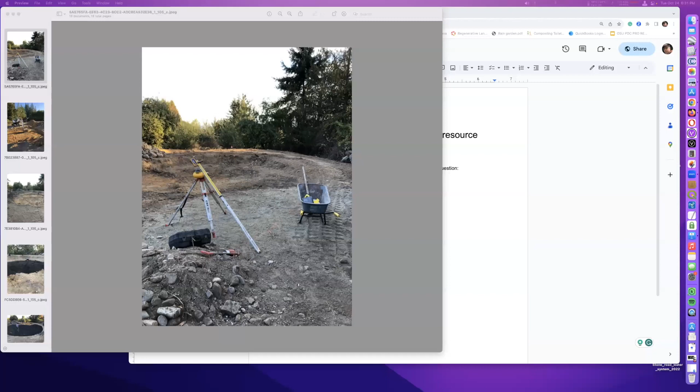All right, so without further ado, well, let me just share my screen here. Okay. And there we go. All right, so thank you again, everyone, and for your patience. For those who were at the Legion last week, we got the first few slides under our belt, but we're going to go through those again. And just a short introduction from my part.

Tonight's title is going to be Rainwater Management, our untapped resource. And this is one of those prime days when we can see how we could do so much better with our rainwater management. We've got a huge volume of water that's come down already today, and it looks like we're in for a little bit more this evening.

All right, sorry about this. I'm just trying to admit somebody. Okay, I'm gonna have to go away from that. There we go. So I won't be able to do that during our talk here. So let's get back to that. There we go. All right.

So here we go. We're going to be talking about rainwater management and just a little bit about myself. I've lived in Lantzville. I guess we've been here 27 years, my wife and myself, and we co-owned our property here with my parents. And we're going to take a little bit of a journey through our homestead during the evening here and touch on that. But again, I've been here 27 years and I'm a regenerative landscape designer and a contractor. I worked with Oregon State University with their online permaculture design course as an instructor with them. Way back about 38 years ago, I took an apprenticeship program with the Vancouver Park System, and that got me set on my way in the landscape industry.

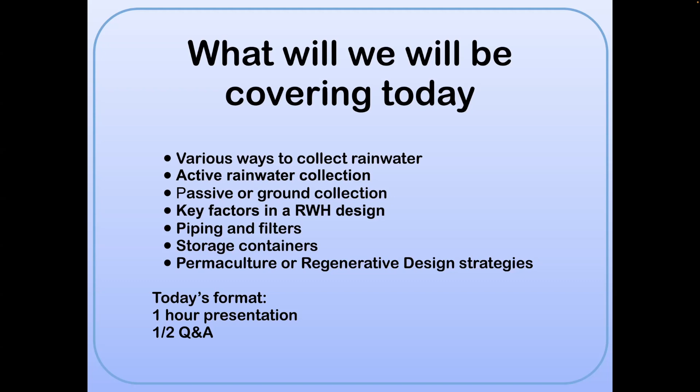And if nobody has questions, I do have a couple extra slides that we can look at, which is always fun.

So just a little bit about rainwater. It's quite amazing that at any given moment, I would say there's approximately 10 trillion gallons of water in the air around the world. And it's quite amazing, the quantity of moisture that's in our atmosphere. And this is just a little diagram about the water cycle itself, and how that water is always in motion, right? It's either evaporating, it's coming down in rain, it could be going across the surface, it could be infiltrating, and ultimately much of this water ends up in the ocean.

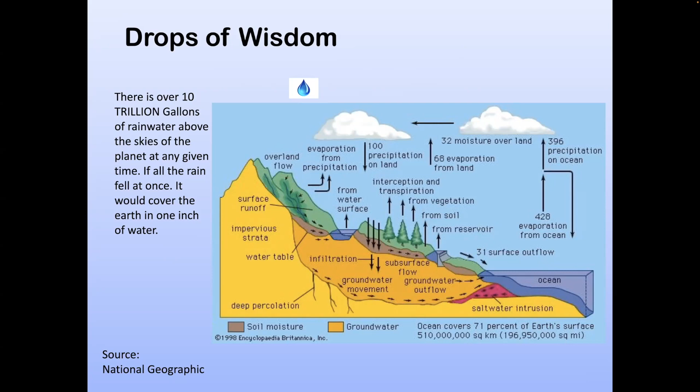So rainwater is distinct, and when we're collecting that, we don't want to get this mixed up with other types of water. So there's storm water, okay? That's water typically off of paved areas, or that sort of thing. If you go to Home Depot in the parking lot there, on a day like this, all of that water is heading across the surface and into storm drains, okay?

And then there's gray water, which is often a product we can optimize in our households. It's often water that's coming from showers, or say the kitchen sink, some sinks, and that's an underutilized resource. We're not really going to talk a lot about it tonight, but that's one of those low-hanging fruits. We have potable water, which is self-explanatory. It's water that meets the Canadian drinking water standards.

We have groundwater, which is actually part of our aquifer, and we have surface water, so water that may be sitting on the surface. So they're all slightly different definitions, and tonight's focus is going to be all about rainwater. So what is it? Well, it's a roof-based system of collection, or it could also be land-based. But when we're collecting off the land, we're doing distinctly different things with these. So that's one thing that we're going to cover tonight.

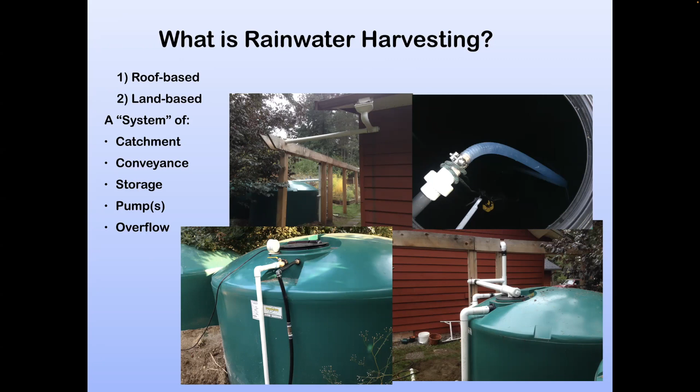So we're going to divert a little bit of that initial water away from storage, and we're going to basically send it back out into the environment because it's not the type of water we ultimately want to collect. And then we have the storage itself with an overflow, and that may or may not have a pump on it. There's lots of things one can do, but in this case, we've omitted the pump.

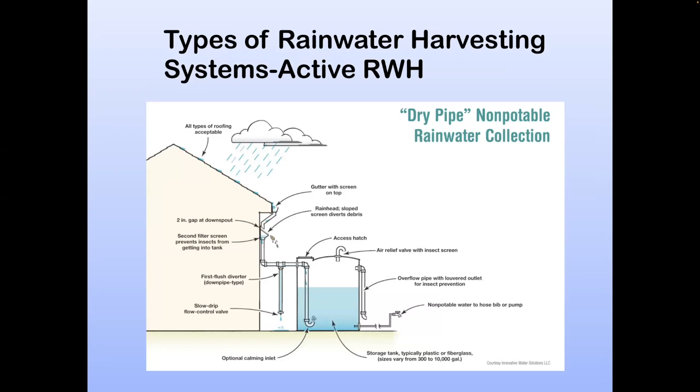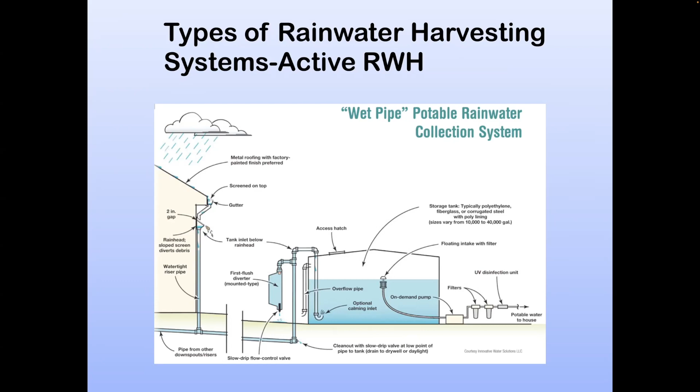Now, when I say that, I mean it'd be a larger cistern, and then we have a lot of filtration that goes on after the fact, as well as disinfection with a UV. So we're just going to touch on some of the parts that are involved with active rainwater harvesting. So putting that water into a cistern.

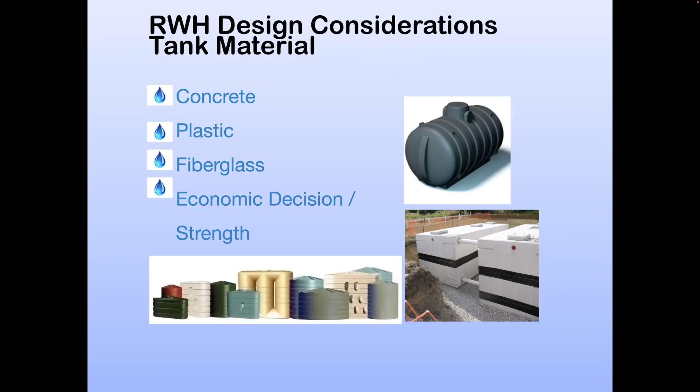So some of the materials potentially that could be used in construction of this would be concrete, and there's plastic or polyethylene. Fiberglass is another one. And a lot of that has to do with your economic decision and the strength that you need. So when we go and we bury tanks in the ground, they need to be able to withstand the forces of that burial. So they subsequently cost quite a bit more, and that may or may not be something that works in someone's budget.

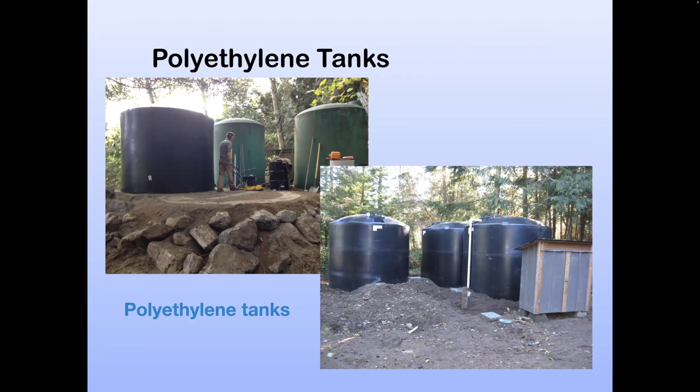So here's some polyethylene tanks. The photo on the top left is actually Angela and my part of our setup. That's as we were expanding it. And on the right there is a system we did on Denman Island, where that was 9,000 gallons. So that's just 3,000 gallon cisterns all tied in at the bottom. So as one fills, they all fill together, and the same when you discharge it. And in that example, we have a little pump house, and there was some fire suppression built into that for this property.

Some other varieties of tanks. There's bladder tanks, which I am not a big fan of. They remind me of a large waterbed mattress, and often they're in really difficult areas, like in crawl spaces. Now, if you bear in mind that a gallon of water is typically 10 pounds, then a 2,000 gallon pillow is 20,000 pounds. And if for some reason that starts to move under your house, which it could, in certain conditions, it's not a good outcome there. And personally, I don't like this approach, but for some people, that is all they can do.

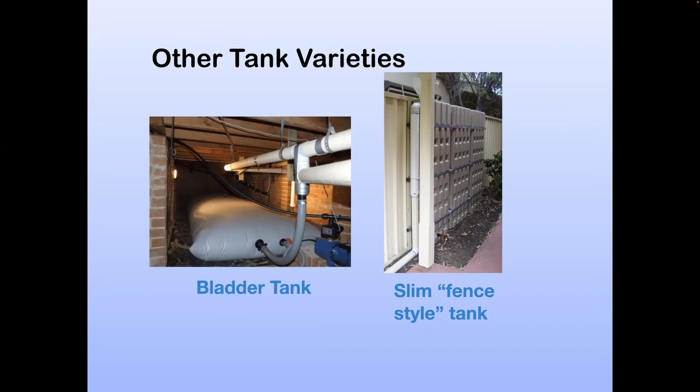The other is these really slim cisterns they have for tough spaces, very narrow spaces. So this is an interesting system. It doesn't hold a lot of water, but for the right client, that may be all they need. What most people find is when they start collecting rainwater, they just want more and more and more. So bigger is better.

This is typical of, say, a commercial installation where they've used a fiberglass tank, and you'll notice there's some metal straps on that, and it's basically anchored to a concrete ballast. So when you're burying tanks, one of the factors you have to consider is when the tank is empty, if we have a high water table, that tank is going to start moving, which it will if it isn't anchored, or it has the potential to move. So the ballast is installed and calculated based on the worst case scenario of a high water table and no water in the cistern, and that'll keep it in place.

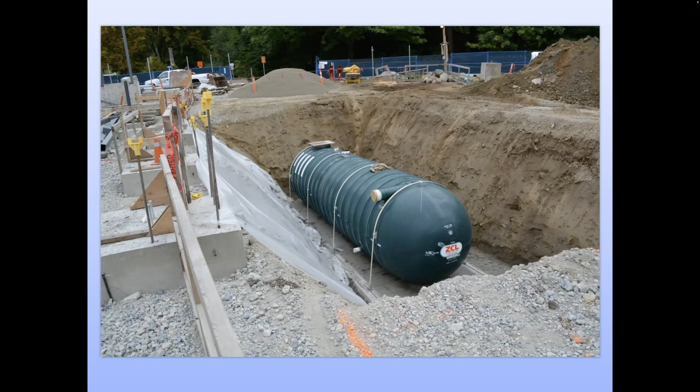So one of these pre-storage treatments that we look at, because personally I like to filter all the rainwater as much as possible before it enters the cistern. That way we have the highest quality water we can get, and we'll have a much easier time delivering it if we, say, push it through drip irrigation, which requires at least 200 microns of filtration in order to ensure it doesn't clog up your system.

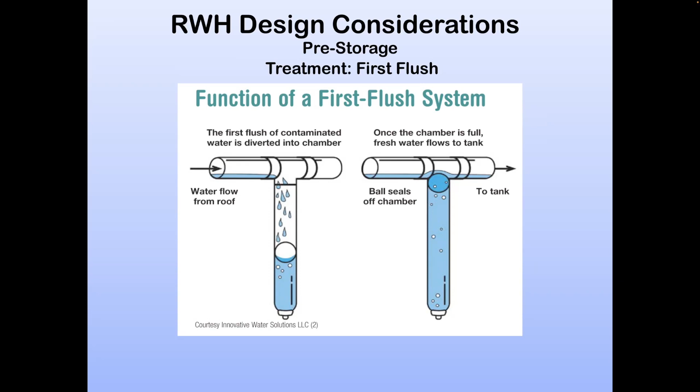The only challenge with that is that dribbler has to be maintained, and the actual first flush itself is calculated based on how much of that initial rain we want to remove, which is quite easy to do. It's just sizing it appropriately. And there's a couple of other options. On the right-hand side, there is a first flush that is horizontal and is placed underground. We've used these before. They work really well.

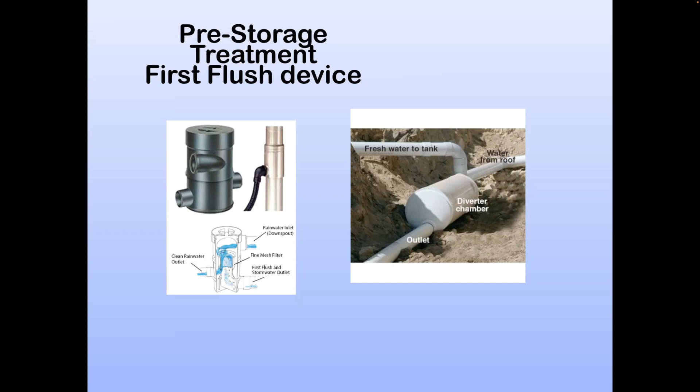It's a similar concept where water rushes into that chamber, and it pushes a ball up and seals the very end. And that is the diverted water, and then it diverts away from the chamber into our collection. And the one on the left there is called a WISY filter, and it again is very effective. Not so good when it's just drizzling, but when the rain has come down pretty good, it's quite effective. And there's a couple of examples of a first flush.

So on the left, you can see the primary filter is way up high in the picture, and there's some piping below it, along with a T that goes off to the storage tank. So the bottom of that T, you can see that whole chamber, that is the first flush device that dribbles into the drain after the rain event. And then again, once that all is full, the water is then redirected into, they have quite a small cistern in this example. And on the right, that's a very large commercial first flush device.

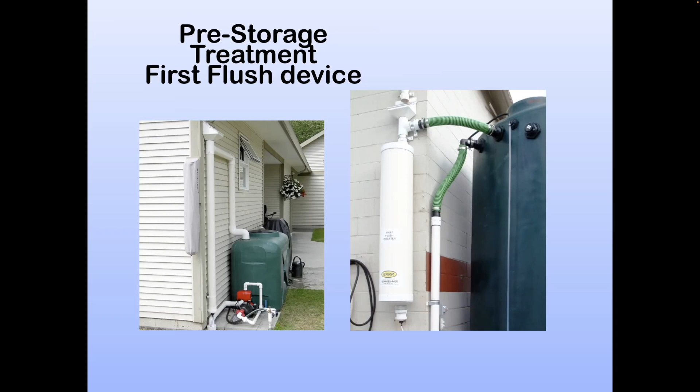That's about 12 inches around, but it's the same principle. It's just taking a certain amount. It's usually the first half millimeter of rain, and you can calculate that with the roof area and know how many liters of water that is and size the first flush based on that. So it's pretty effective. But again, the bottom of all these units you have to maintain, or this will not dribble out effectively.

So I'm not a huge fan of first flushes because I've seen them fail. And the only reason they fail is because of the maintenance end. That's just one other thing that people don't want to deal with, and I totally get it. So it is very hard to get away from some level of maintenance.

This is one of my favorite options, and it's one we did at our home, and we'll see a few pictures of it later. But basically what we do is, and the same with this example, this is a small pump chamber. It's only about 50 gallons, and it's buried below ground, and the top of that lid is at grade when it's all backfilled. In this example, there's a basket inside the filter. So the rainwater comes in the top through that open pipe that you see. And in this example, it was collected off of all of the roof surfaces on this house.

And what we do is on the right-hand side, you see that white fabric filter. That's called a Tuffy filter. And we will put that in with the coarse basket. And we get 40 microns of filtration when we do that. So it's extremely effective. Now, saying that, we still have to maintain the Tuffy filter. We have to take it out, and you can hose them off a number of times, and then eventually you have to get a new one.

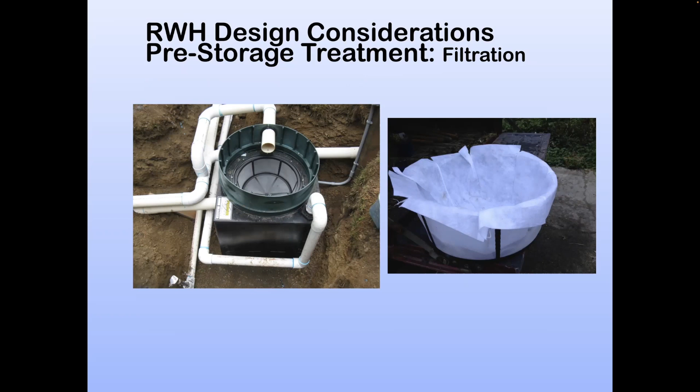And in this example, we'd also had a couple of floats in the cistern, one to tell us when it was full of water, and it would cut power to the pump. And when that happens, then all the water just goes into overflow. So again, that's a really important redundancy to add to a system, is overflowing.

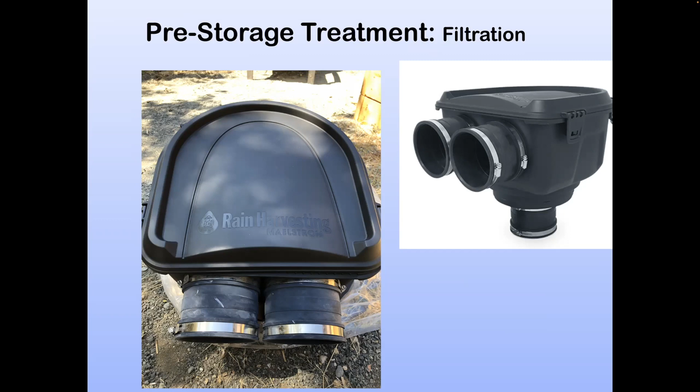Okay, and here's a beautiful filtration setup, but again, it needs a little bit of maintenance. We're not seeing it in action here, but basically water comes in the right-hand side, that top right-hand side Fernco fitting with the band on it, and the water will basically dump out the bottom into the tank, and the dirty water gets pushed out the other upper area, and that goes off into the sanitary sewer or storm or wherever you're hoping to push it. So this is a really nice filter as well.

We are going to take a quick peek at the importance of overflow here and the calming inlet. So these are more details that you may not be interested in, but basically if you send rainwater into a cistern, there is this biofilm inside the cistern, and you don't want to disturb it. It's actually a living biofilm that interfaces the water to the tank. And if we send the water in just through the top of the cistern, we get quite a bit of disturbance, and we'll get a lot of sediment moving around in that cistern.

So if we do, in this example, a calming inlet where the water comes down a pipe and then basically shoots back up, basically a T and a couple of 90s, we have the water pushing up into the cistern and not disturbing the sediment at the bottom. So even if you're doing a lot of filtering with your rainwater, you eventually do get a buildup of some material. And I can say with our cistern, we have a cistern that's 25 years old and it's never been cleaned out. So there is a small amount of debris in it, but it is not by any means a concern. So one reason I really like, well, not to over filter, but to filter well before we're into the storage.

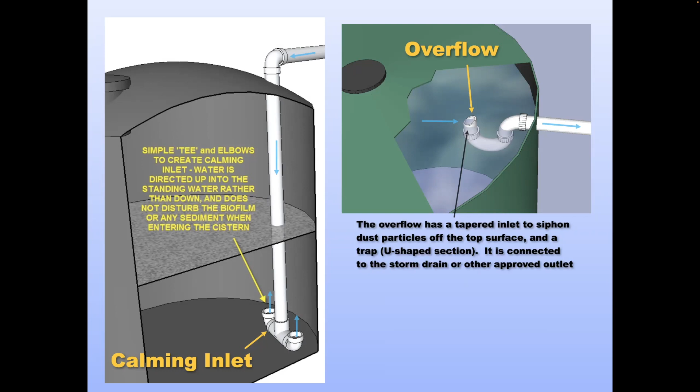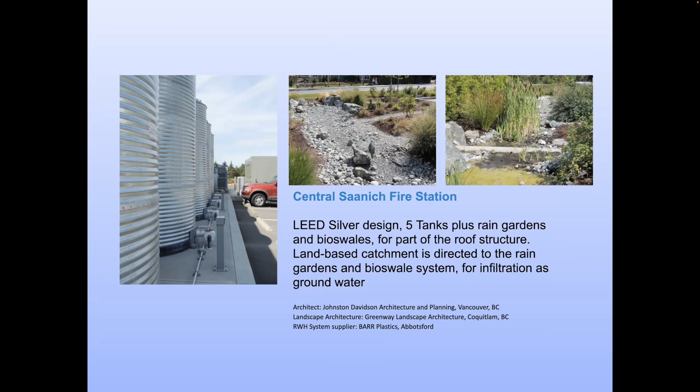So if we look at the overflow here, typically we'll cut that overflow on an angle so it siphons off the surface of the water, any particulates that may end up there. And then we just have a couple examples of some active systems, and then we're going to look at a different type of rainwater harvesting. And the downside of these active systems, I would say, is the cost. They're not cheap to put together, whether you're the Central Saanich Fire Department or whomever. In this case, they have these galvanized cisterns that are lined with poly, and they can capture a substantial amount of water here. When these are filled, it then is designed to go into a series of rain gardens and bioswales, so the water is being infiltrated back into the landscape, which is a wonderful idea.

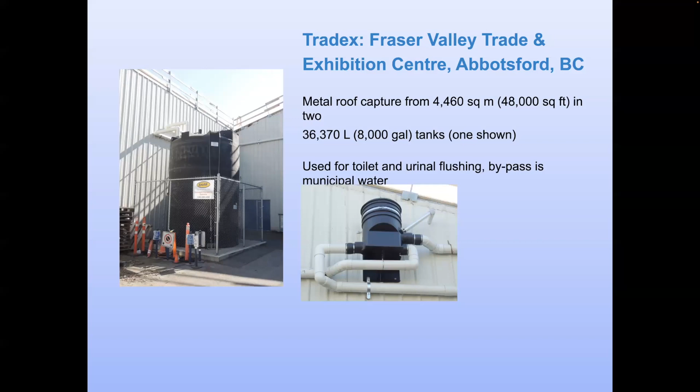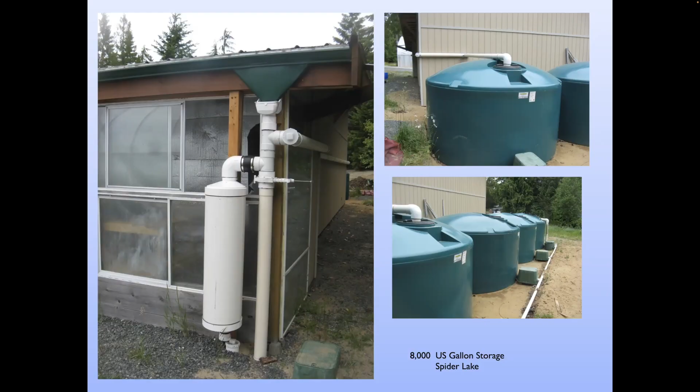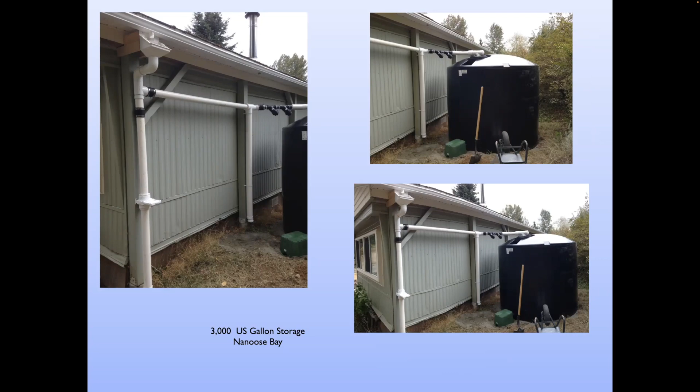And we did a nice little system where we used a different type of filtration, but the same idea. We're trying to get that water as clean as possible. And in this case, if you look at the photo on the left, there is what's called a sliding gate valve about halfway up that pipe. So when the cistern's filled and you pull that lever into the open position, all the water goes to where it used to, in the storm drain. So we like building in bypass for these systems, because they do fill up pretty quick, and there's no point in filtering water that you're just sending back out to the landscape. And then this is our little system that we've put together.

We just added this pump chamber over the fall, and believe it or not, our 11,000 gallons is completely filled as of last week. So even today, all of our rainwater is not going into storage. We're sending quite a bit to a rain garden we have, but yeah, we've already filled up all our needs. Well, not all our needs, but all our storage capacity for next year.

So the one part about rainwater harvesting that I find most exciting, I love capturing water in cisterns, but passive rainwater harvesting, I think, has such potential in all communities on the island. And, you know, especially Lantzville, because before we had our hookup to City of Nanaimo water, we were having to make it on our own. And this is one way that I see it, water that would normally end up in our storm system being re-infiltrated back into the landscape.

So we have a little definition here of passive rainwater, and that's basically we're collecting and infiltrating rainwater into the ground. And we're not putting it in a tank, so we're putting it in the ground. And of course, doing that is far less costly. It has a huge impact.

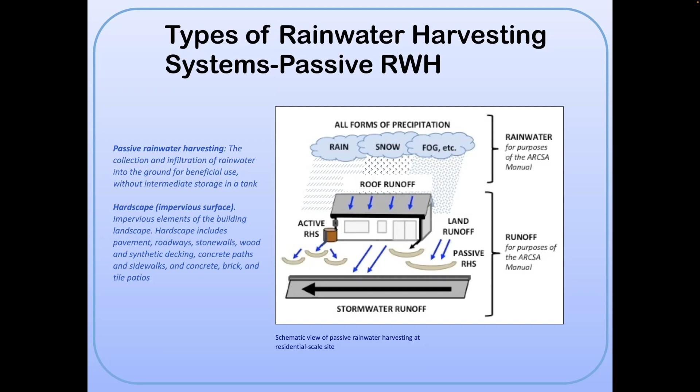So there are some really simple things. We're starting very simple here with the passive structures. You could just have a basin. So as you know, if you dig a depression, you're going to have water collect in that. And then what'll happen is after it rains, that water will typically infiltrate below. Now, this is all based on having the right soils, but I'd say Lantzville is pretty well positioned that way.

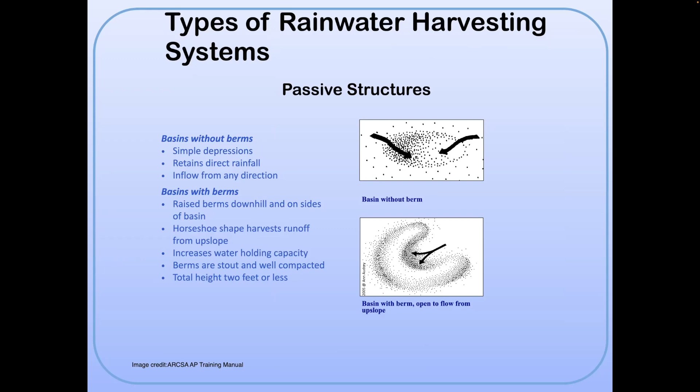I know where we are in Upper Lantzville, we have a sandy loam, so it's kind of a very sandy, gravelly soil that infiltrates very, very quickly. If you had clay, say you were in a lowland and had a bit of heavy soils, you had more than 30% of clay in your soils, then these type of systems would not be good, because you'd basically be ending up with a pond versus an infiltration pit.

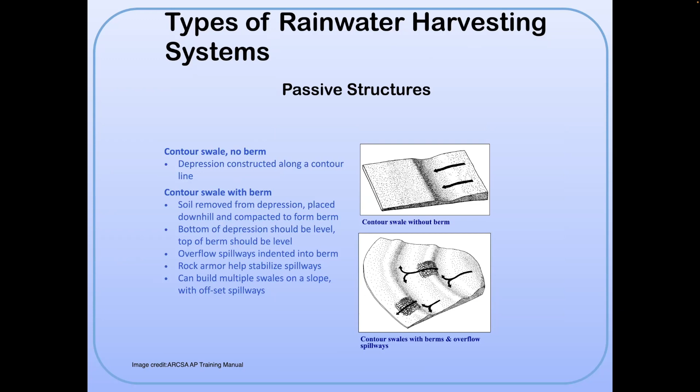Yeah, so you can do swales. I'm sure a few people have heard that word before, and swales really are just ditches of sorts, but they're a little bit different in that we can plant them differently than we would a ditch. A ditch is often just scraped out, and it's quite amazing when you think about it, the fertility in most ditches and how quickly the vegetation grows. And there's a lot of similarities with swales and rain gardens as well. That's where all the water goes, and with that, fertility follows.

So in this example, well, it's an example of a swale, but you can see all the planting that's downhill from this, how it would benefit from that water table being established. Now, I shouldn't call it a water table. They call it a water lens or a plume. And over time, it will increase.

Now, saying that, when I went through my permaculture design training, I was quite excited about swales, and I put them in a few landscapes that we were doing. And they worked quite well, but they fell a bit short of what my expectations were. And I must say that the rain garden concept has really filled that quite nicely, and we're going to take a look at that tonight.

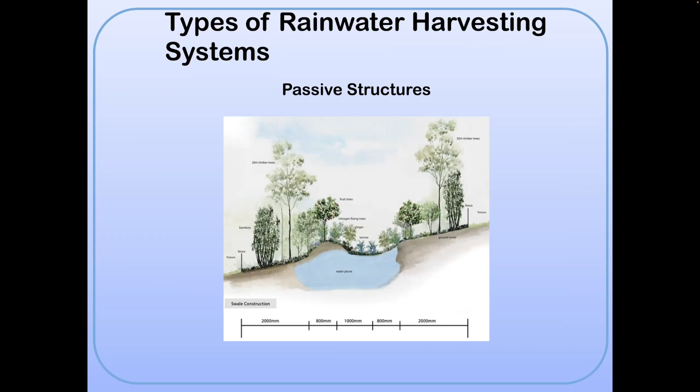So one thing that's very interesting that they do in Tucson, Arizona, and that's where these images are from, Brad Lancaster in Tucson, Arizona, he's written a few books that I would highly recommend. Rainwater Harvesting for Drylands and Beyond. He's got a two-volume set, and they are fantastic. He's got a great website too. Just even checking that out, it's really informative.

Now, you might say, well, this person's in Tucson and we're in the west coast of British Columbia, and they're very different climates. And you'd be quite right. They are, but there are aspects of these strategies that we can, I won't say manipulate, but we can tweak a little bit to fit well into our climate. So we know that we get long, hot summers. They're very dry for the most part, right? Not every year, but most years. And we know most winters are kind of like today.

They can be. We get most of our rainfall in November, December, January, and those are months when most things are dormant, so they're really not helping us out. So the one thing that we need to be careful of is that if we're collecting rainwater into basins during the winter, we're not drowning out our plant material. There needs to be some thought given to those plants and how they are going to survive through both a flood event and a drought event in the summer.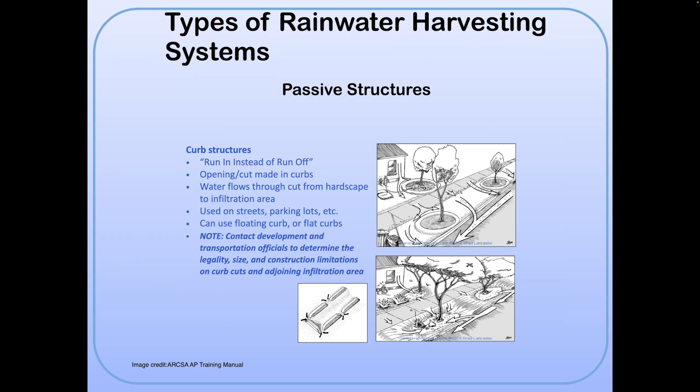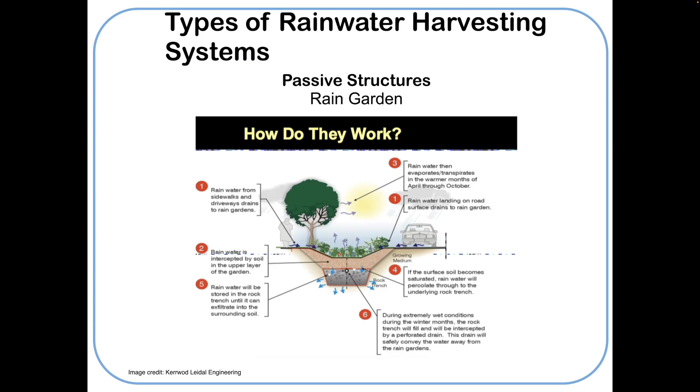So that's where rain gardens come in. And there are a number of different approaches to it. This is a very typical section drawing of a rain garden that you might find next to parking or next to a roadway. Well, I won't say over-engineered, but they've been quite careful here to have a large rock and drainage pit at the very bottom. And I understand that for certain settings, that is a great idea. For most residential settings, that's not required. We just need to create a basin, put in some good growing medium and appropriate plant material, and we're off to the races.

So this is a nice example. There are some in Nanaimo here. I should maybe update my pictures one day. Certainly around Buttertubs Marsh, there's a development there that has some beautiful roadside rain gardens and bioswales. You'd probably drive by and not even really notice it if you didn't know they were there. They're just a depressed area between the sidewalk and the roadway. And the nice thing about these is they will take some contaminants off the road and remediate them before they get further along in the drainage system.

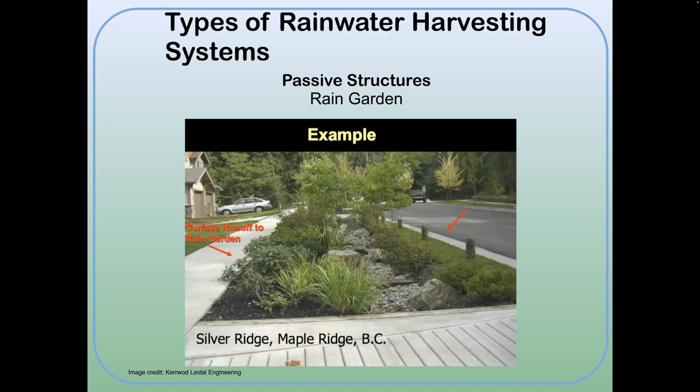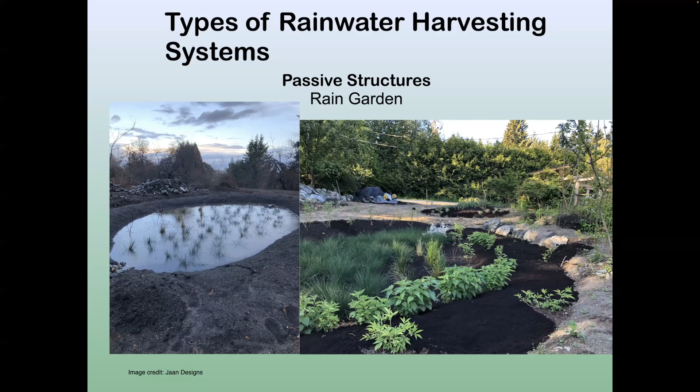So here's the rain garden, and I'm going to probably show you some other pictures a bit later if we have time. This is a rain garden just during construction on the left. I guess that was about October, November. And we just managed to plant the bottom of the basin at that time, and then a little further along on the right. And that was probably more like May.

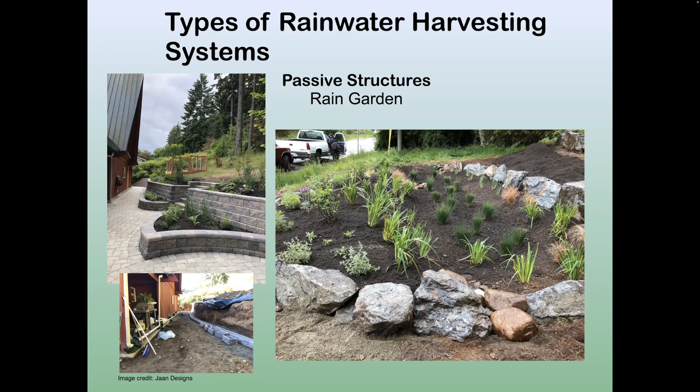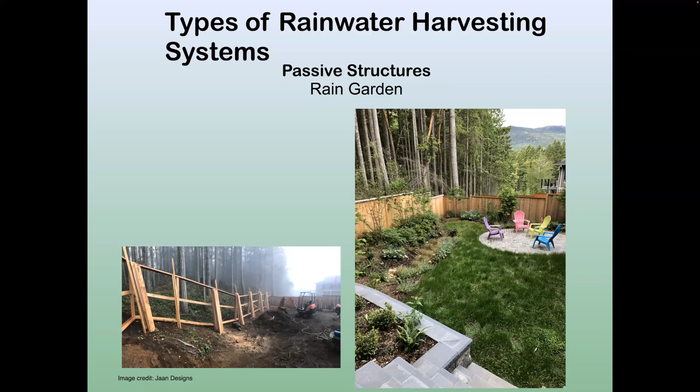And here's a little rain garden we did in Nanaimo. It was collecting water at the back of the property behind these retaining walls and off the patio surface and the roof surface, and then pushing it into the rain garden at the front of the property. That then benefited the landscape that was downhill. And this is a little rain garden we did in Nanaimo, and you can barely even tell it's there. It's just to the left of the patio. It's this long, narrow rain garden collecting water off the rooftop.

So that is a little bit about active and passive rainwater harvesting. What I want to do is just touch on a few strategies that everybody on the call today or watching this video could potentially implement in their own backyard or their own property. It again takes a fair amount of resources to put in an active system. A rain garden is definitely a good choice, a very good choice. But there are other things that we can do, and I wanted to just touch on those today.

So permaculture or regenerative land design is a slightly different approach to landscape design. We could spend weeks talking about that alone. But basically, well, we'll take a look here. It's basically an ethics-based design system. And the ethics of it are earth care, people care, and return of surplus. And this was developed by Bill Mollison and David Holmgren back in the 70s. And it was really created to help repair some of the damage that Bill Mollison saw in our typical agricultural systems and how detrimental they were to soils and to habitat. So that's where this all started, and then it kind of grew from there.

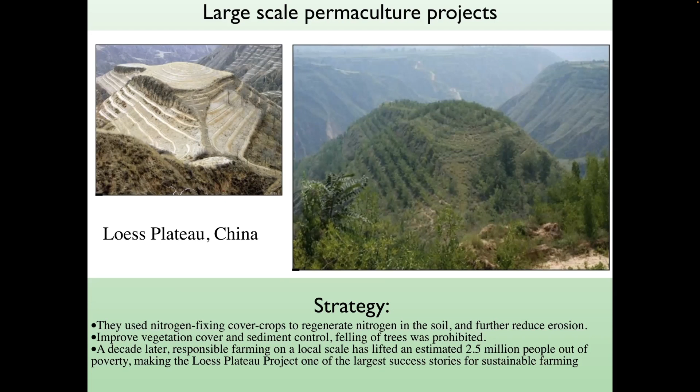And what they did was they were very careful about grazing, right? They made sure all the villagers followed a certain protocol, so there was grazing allowed, but it was well thought out and well managed.

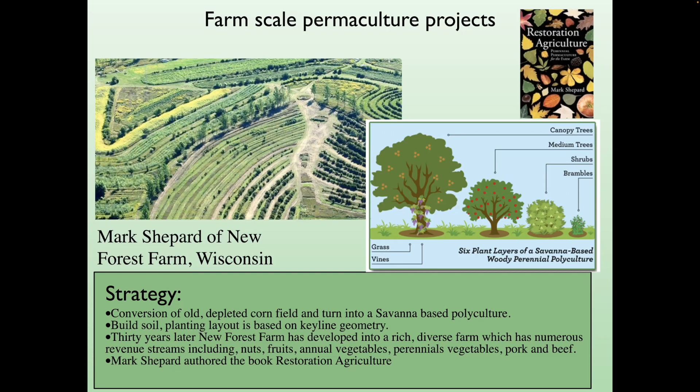We see farm scale permaculture projects. Mark Shepard here in New Forest Farm in Wisconsin took an old burned out cornfield and created a diverse perennial and annual food system. So there are nut trees, there are berry bushes, there are annual crops, there are areas for livestock to run between the trees. And now this farm is overproductive. They cannot keep up with what's going on. So I'm not sure if this is going to work.

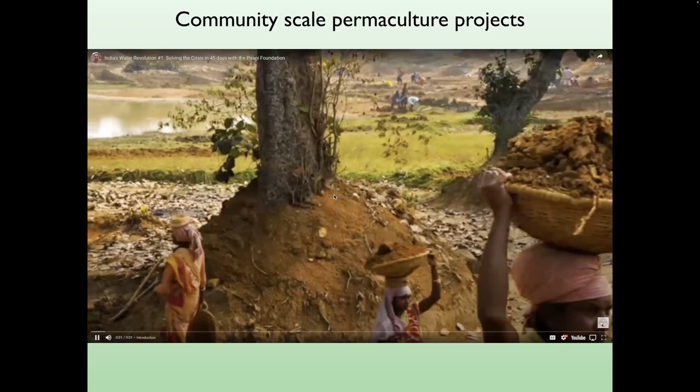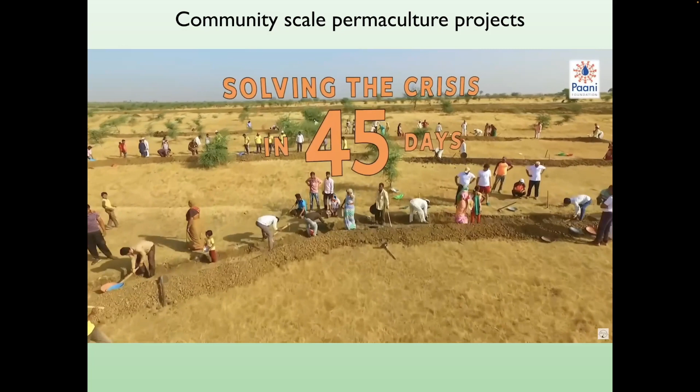I'll just show you the first few seconds of this. A friend, Andrew Millison, went to India and filmed this. So this is well worth checking out. I'll leave a link later in the show here.

These villages are facing a drinking water problem, scarcity of drinking water. Now you can see.

So it's a pretty amazing story, and I highly recommend people check it out. Again, we'll have some links at the end of the talk.

But that's Andrew Millison. He's from Oregon State University, and he created the Oregon State University Permaculture Design program. But he went over to India to learn more about their water challenges, because you can imagine that with our climate shifting, of all the countries that I'm aware of, Africa and India are a couple of the top ones that have probably the most brittle climate, very hard climate, and high temperatures. And so agriculture is a big challenge there.

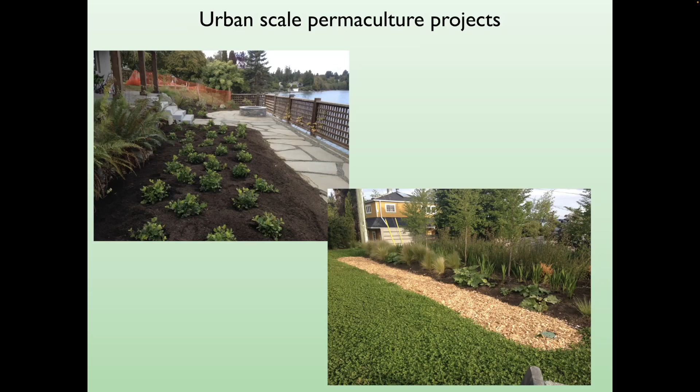This is just a little project we did in Chemainus. So you can see there's a small swale with wood chip fill, and this collects water between the curb and this bed here and helps to infiltrate that. And then we have sort of a clover fescue ground cover grass. So again, the swale and rain gardens are all about benefiting plants that are downhill. And that's sort of a typical permaculture image from a company in Victoria, Hatchet and Seed.

And then there are some strategies that we can take away from today that I'm sure many of you will have heard about. The first obvious thing is to always have your soil covered, right? So with mulch, and that could be all kinds of things. In a permanent planting, you could use wood chips from a tree company. You could use compost. You can use straw. Leaves are great. All kinds of different products can be used as a mulch, but covering the soil early in the spring, or later in the spring, can really help save your vegetable garden, right?

So as that soil heats up, that blanket of mulch is going to keep things cooler and also reduce evaporation and inhibit weed germination. There are a lot of advantages. If you did nothing else and you put wood chips around your permanent plantings, you would see some benefit there right out of the gate.

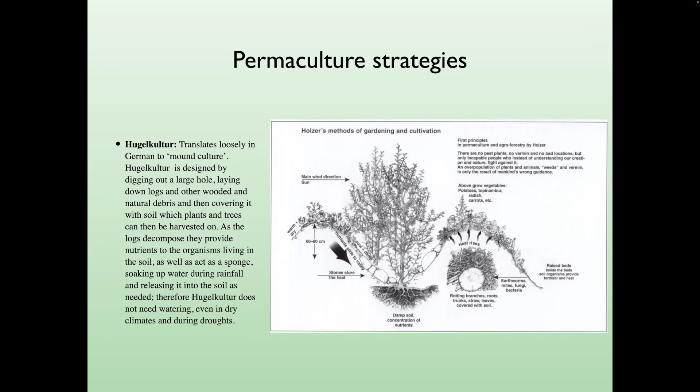You get the long-term benefit of this wood breaking down slowly. It's going to hold nutrients. It's going to hold water inherently. Those logs and that wood will be much like a sponge and just add a huge amount of organic material to the growing area.

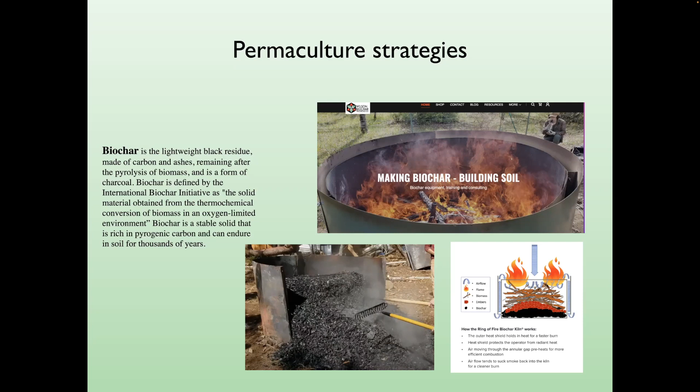Another thing that we do, not as much as we used to, but we will create our own compost, really high quality compost, and then we will extract it. Now, I don't know if this, there we go.

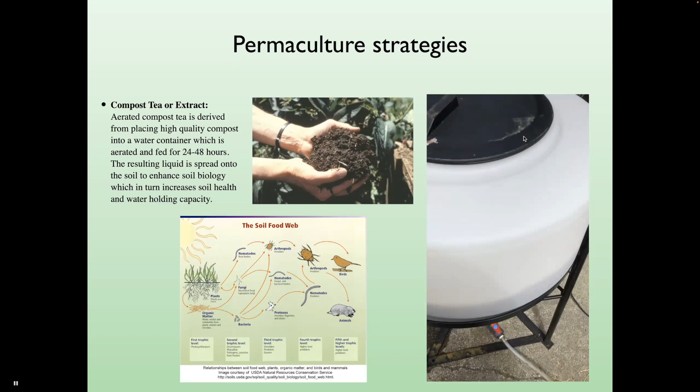So basically what it is, a vessel being driven by an air pump, and we have a mesh bag that's filled with compost, and we put it in the extractor for about 20 or 30 minutes. And what happens is it strips all of the life forms off of the compost. So all of that soil biology, that diverse biology that's in the compost, is now in the liquid, but it's in an oxygenated environment. So it's alive. And what we do if we're doing extract is we will then just empty the vessel into a watering can and apply it manually onto any growing areas that we want, in particular, like for annual vegetables. If they're struggling a little, this is a great way to give them a bit of a boost.

You can also make compost tea, which is basically doing the same thing, but then adding some food and extending the brew time, 24 or 48 hours, to get a really dense population of organisms. So it is a much harder process. The extract is very simple. And so simple is often best, and that's why we will do that more often than not.

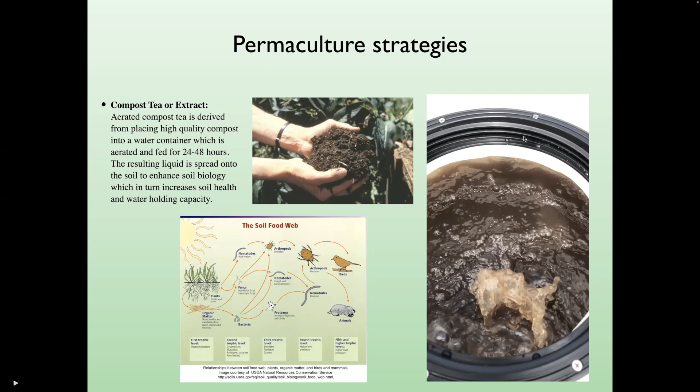And then basically that is the end of my presentation today.